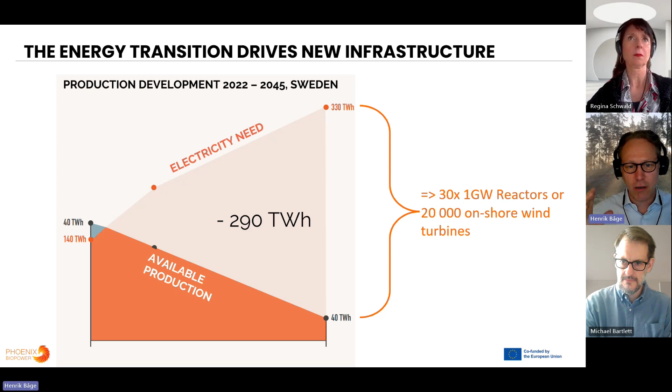And if we want to put that into manageable terms, one extreme would be to build 30 1 gigawatt nuclear reactors to match this need, or 20,000 onshore wind turbines. It's just not going to happen. These are the two extremes, just to give you a mental picture of the challenge that we meet. We think that the future is a mix of everything.

And our part of the answer is high efficiency biopower, which is on demand, so you can respond to need that varies across seasons, but also as short as intraday. It's scalable from a somewhat small size of 10 megawatts to beyond 100 megawatts electric per unit. And this will enable a massive climate impact through implementation of our technology. So how do we do this? Traditional steam biopower is basically a steam engine.

You take your fuel, you burn it in a boiler, generate steam to drive a turbine, and you get roughly around 30% electrical conversion from the energy in the fuel to electricity. The rest is heat. What we do, we take the same fuel, but rather than burning it in a boiler, we put it in a pressurized gasification system, whereby we heat up the fuel to around 900 degrees with very little oxygen. That means the solid biomass is then converted into gas, which we clean up.

We add steam into the process, and then now I have a clean syngas, which I use to drive a gas turbine. So we're not using a steam turbine, we're using a gas turbine for the burning. And that one in turn drives the generator. This is a more efficient thermodynamic cycle whereby we produce more electricity. At the back end of the gas turbine, we have a steam generator, which generates the steam that I use in my system. And the steam also works as a heat carrier to carry over the thermal energy from the gasification to be recycled in the gas turbine.

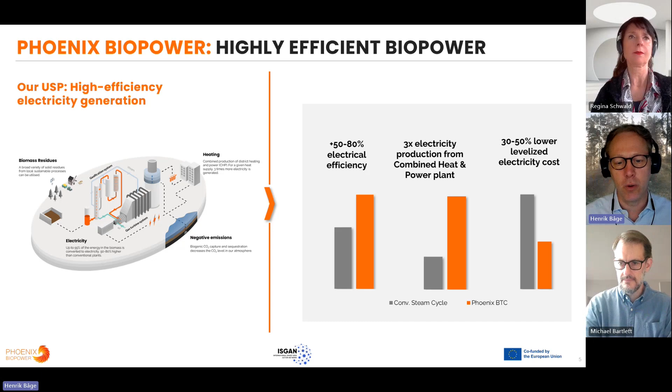This technology for many people sounds like a very narrow Nordic-based kind of thing, because yeah, we have a lot of forests here in Sweden, as you can see here behind me. But this is actually a very, very big market, because we're not targeting just forest residues. We're also targeting agricultural waste streams. So basically wherever you have farmland, you have waste streams, and there is a market for us where there's fuel. So we see that the serviceable obtainable market in the short term is a €1 billion market. And the bioenergy market grows 3 to 4 times more than the global economic growth per year. So this is really a growth market that we're targeting.

Within the space of our technology platform, we can then address certain different market areas. One I've mentioned is the biopower and heat, or the CHP market, and also the negative emissions biopower with BECCS. But we can also split apart our plant technology into two main subsystems, the gasification and the gas turbine, where the gasification system can be used to utilize biomass waste streams to produce industrial feedstocks in terms of green gases for industries, like hydrogen or syngas that can be used for methanization processes in the chemistry industry, or you can use it as a burner gas.

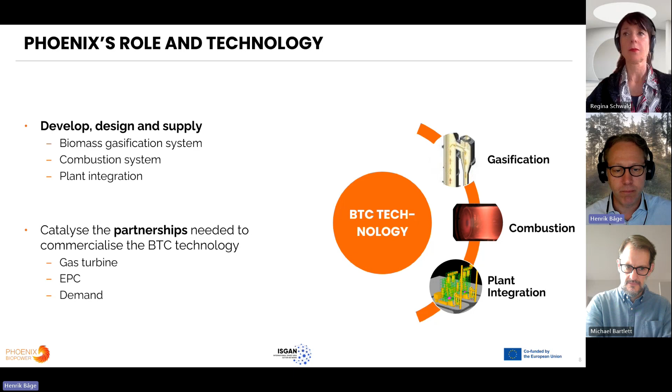We are a small team now. We're about 12 people, primarily located in Sweden. We have a high academic profile with several PhDs and a professor. And also we have broad experience from notable companies from industry, both within renewables, but also in heavy industry. And we've invested quite a few man years in our careers, but also in the technology development.

And with that, we'll see if we can show a little film, and then I'll be handing over to my colleague, Michael. So this is basically an illustration of our smallest plant, the BTC, we call it the P10, which is a 10 megawatt plant.

I don't know if the film keeps stopping. I don't know why.

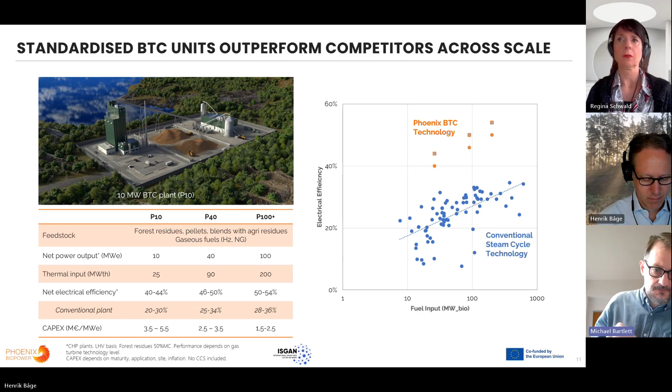If we look also at applications where we have negative emissions, we've seen, of course, across the IPCC scenarios, but also from the International Energy Agency, that carbon dioxide removals are core to reaching net zero and even to compensating for an overshoot.

With biomass, we have a unique situation where we can utilize waste streams of biomass, bringing in the carbon, let's say, that the trees have absorbed, and capture that and sequester it. And at the same time, we provide services such as electricity production and heat production. So this is a large difference towards direct air capture, where you're just consuming energy to do carbon dioxide removals. Here we are producing useful products for the market while doing carbon dioxide removals.

That, of course, is not unique to the BTC. So if you compare it to conventional plants with a steam turbine, we have studied this quite deeply and seen that we have a consistent improvement of about 60% more electricity per ton of negative emissions that you generate. So that represents this 60% increase from a conventional plant to our BTC. And that drives also economics.

And across all of this is why we try to go to higher efficiencies, because it decreases fuel costs. And it also decreases specific capex, because per megawatt hour of electricity produced, you have more capex if you have a steam cycle, because there's less electricity. So these things drive us towards cases where you have negative marginal operating costs, and a plant, therefore, that would stay in operation throughout a year.

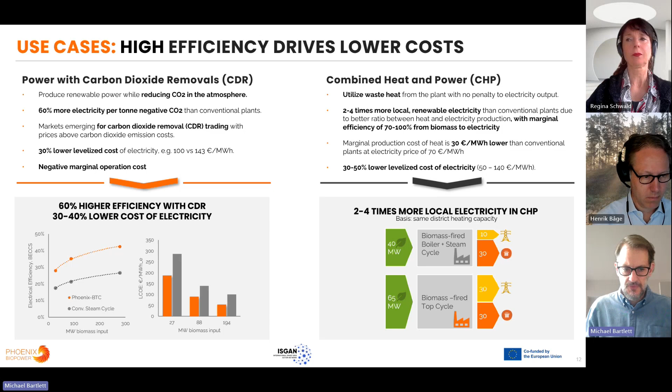So that's a little bit of an overview of the use cases of how this technology will fit into the energy system. Now, importantly, how do we get there? We have a scaling roadmap where we want to install the first P10 unit by 2030. And working back from that, we need to start working on the EPC and the demonstration plant today.

It goes via a basic scale-up where in the first phase, we build the gasification system at full scale, but we operate at reduced pressure and power with a rebuilt gas turbine. This is to make sure that we have reduction of risk before going to the full scale plant with a brand new gas turbine. So we demonstrate here that the BTC technology works. We demonstrate the gasification system integrated with the gas turbine. And then we go up in pressure, in power, and with a new gas turbine to achieve the full 10 megawatts of electricity.

So that is a brief overview of Phoenix BioPower and our technology of the BTC. Now I'd like to step into the Bio-FlexGen project, which is a great project we're conducting together with many partners within the EU, with the purpose to increase the cost effectiveness and flexibility of biomass-fired CHP plants. We have partners across the spectrum from technology owners like Phoenix BioPower, through research institutes, universities, utilities, LCA experts, etc. And it's a 3.5 year project with 6 million euros in budget.

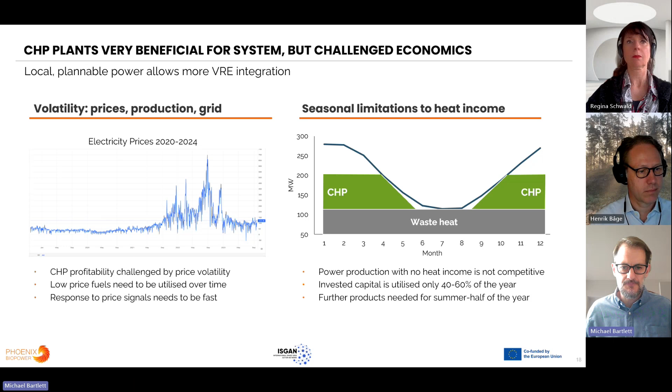So as you can see with a CHP plant, this is the total demand of heat over a year, but typically the base load is filled by waste heat or some sort of very low cost supply of heat, and the CHP plants run a limited amount of hours per year, maybe 50%. And so there are several challenges here that we're trying to meet. One is how do you efficiently use the capex that you've deployed during this period of year where there's no demand for heat? How do you make the plant competitive and give products to the market which motivate operations? And what is the technology required for that?

So we came up with basically 3 operating modes to meet those challenges. The first mode is to run the plant as a CHP, which is what it's meant to do, produce heat and power with very high yields of electricity. And that, of course, stabilizes the system, allows more penetration of variable renewables because you have stable local production and transmission capacities are no longer limiting.

The second mode during the summer season is to switch from producing power and heat to producing hydrogen and CO2. And this is basically utilizing that same gasification system we talked about earlier, but instead of sending the syngas to a gas turbine, you send that same syngas to a hydrogen production unit. And that hydrogen production unit basically shifts the CO content to hydrogen, removes the CO2 that is generated, and then purifies the hydrogen. So you have 3 main steps in turning syngas into a high quality stream of hydrogen.

And the idea here, of course, is that the hydrogen can be used by industry and brings value then to the plant, thereby allowing the operations. The third mode is that while you're doing this gasification, of course, the gas turbine is idle or is offline. So how do you operate it if there are needs to support the system?

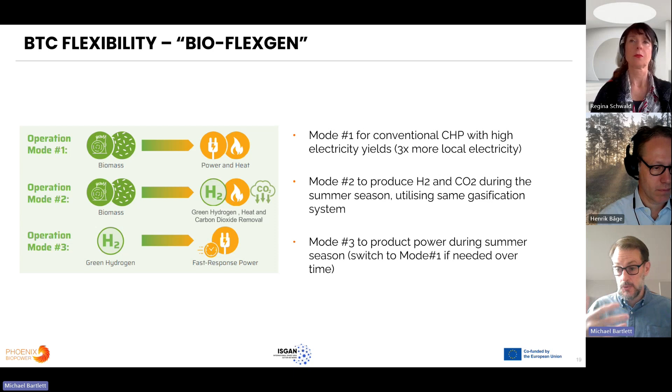Conventional CHP operations, producing hydrogen and biogenic CO2 during the summer season. And then the third mode is producing power from hydrogen during the summer season when prices demand it. So the three main technologies that are required to do this are as follows. I'll give you a brief outline, and then we have a second webinar where we'll go into the details of each of these technologies and present the results of how far we've come.

So the first technology we have is the gasification. As we outlined earlier, the gasification system takes raw biomass, combines it with some oxygen from air, and heats it up in a fluidized bed where it converts into syngas. Syngas is a combination of hydrogen, CO, methane, CO2, and contaminants like tar. The gasification system in the BTC has to operate at high pressures to be able to operate with the gas turbine efficiently. And if we now add on the requirement to operate during the summer times, it has to be able to switch from oxygen-blown operations when it's producing hydrogen to air-blown operations when it's producing power.

And this capability is not trivial. It means that you have to manage quite different velocities and airflows in the reactor, and we have to manage the temperature profiles in the bed in the oxygen-blown case. So that is the main focus of our technology development: how do we operate at high pressures? How do we swing between oxygen and air-blown operations? And how do we utilize that across the different loads that are required for the gas turbine?

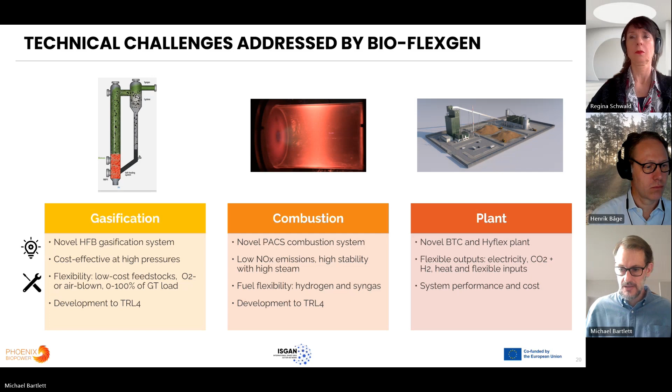So this was a run-through of the BTC in general, Phoenix BioPower as a company, and a very high level on the BioFlexGen project. We'd love to tell you all about the achievements so far, however there's just too much to go through, so we're doing a cliffhanger now and will detail that in the next webinar. However, we have very good results: the gasification concept is being proven out at the 5 megawatt scale cold rig and the fluidized hot rig. And the burner and combustion system development is going very well, giving very low emissions and good stability across the fuels.

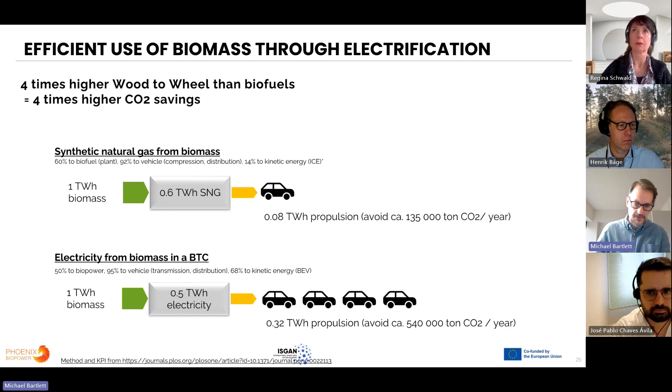Of course, the risk is that there can be tar bridging and there can be fouling here. And that's one of the key operating know-hows as to how to operate this system with high reliability. But that means that we get tars into the syngas and we get that into our combustion system. And there we see we have a very good performance with the atmospheric tests that we've done on converting that cleanly to CO2 without any CO or particle emissions.

Yeah, indeed. Also, Rolf asked exactly that. How is the cleaning done to remove the tar? So I think also you answered that question.

Yeah, already. And as to biochar, when we're using woody residues, we convert as much of it as we can to syngas. That's our target, to have efficiencies above 97% in the gasifier. That means 3% is biochar somewhere, roughly. And that stream basically ends up in the bottom ash and the fly ash of the filter, and that needs to be taken care of in the second step. The bottom ash from the gasifier is actually quite much like from a boiler. You have very low levels of carbon in it.

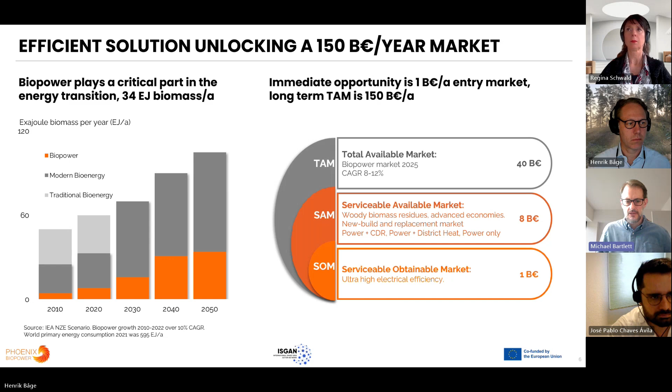So I think one challenge has been absolutely to find venture capitalists who have the mindset around biomass and biopower that matches our vision. High capital costs for the first plant, certainly it's a high risk thing to put these things together and make the first plant. To make that scale up process I showed you, this is roughly a 1 billion crown, 100 million euro project. So that is, of course, a large amount of money that we need to mobilize.

Henrik, do you have any further comments on that? No, not really. I mean, especially around the biomass, the feedstock, there's been a lot of discussion, especially outside of the Nordics, of whether to use virgin biomass for energy and whether that is sustainable or not.

With the new RED3 in Europe, the cascade principle will be implemented. So we all know what a plank looks like, and we also know what a tree looks like. They're kind of not the same. So first you do your lumber for planks and your boards, and then you take high value parts of the tree to make pulp and paper. And then you go to fibers and chemicals.

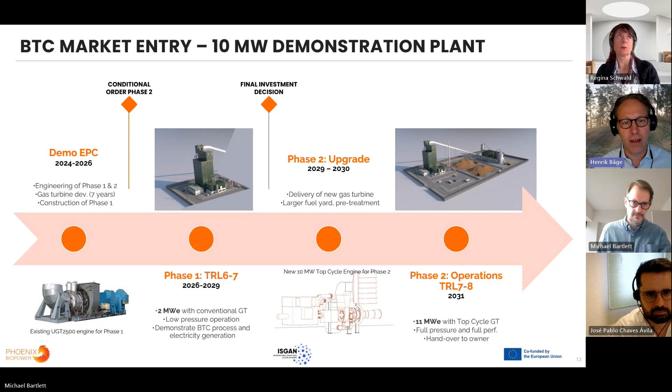But you will still have about 20-25% of the biomass in a tree that you cannot use for higher value products. That is today used as energy throughout the Nordics in our CHP and heat plants for district heating. Now, luckily, last year we educated the rest of Europe. This is how you do sustainable forest management and usage of the biomass.

And with the new RED3, the threat against biomass as an energy source has sort of been handled and accepted, because there are very different views of how to manage forests in, say, Benelux than Sweden. Because I think 60-70% of Sweden is covered with forests. So we have quite a few spruces and pines.

So I think one hurdle we've been facing in terms of the funding and the development and sourcing venture capital for this development effort is the ambiguity around biomass as a renewable energy source. Thank you. Very good. Yeah, it's really under discussion currently, how to manage woods.

And what's also interesting, the forestry industry of course generates a large stream of residues, which certain countries have mobilized, other countries have not. And then, not to forget, there are large streams of processed residues from agriculture. Of course a lot of that can be ploughed down again, and a lot of it can be used as feedstock for animals.